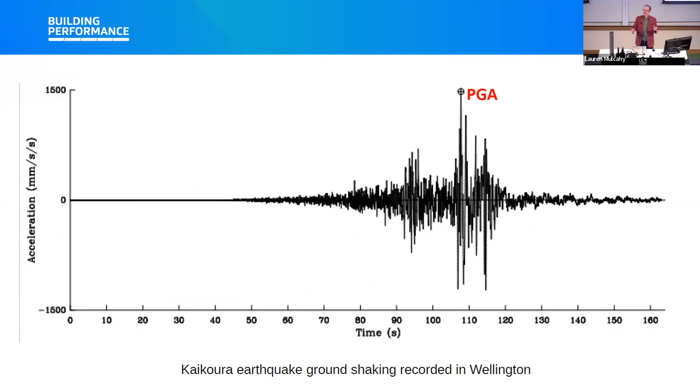Here I have to resort to a little bit of teaching in my new role. I don't get to teach as much as I used to, so please bear with me. But I think it's a good idea that we all start with the same basis, so let me explain exactly what the response spectrum is.

The response spectrum essentially captures a summary of those peak values of response of the structure, as opposed to the PGA, the peak of the ground motion. I've got a ground motion up there on top. I run that ground motion through a whole bunch of lollipops, single degree of freedoms with different periods, 0.5 seconds, 1 second, 2 seconds shown there, and I get some peak displacements. I summarize those peak displacements in a displacement spectrum. That is the output of the National Seismic Hazard Model.

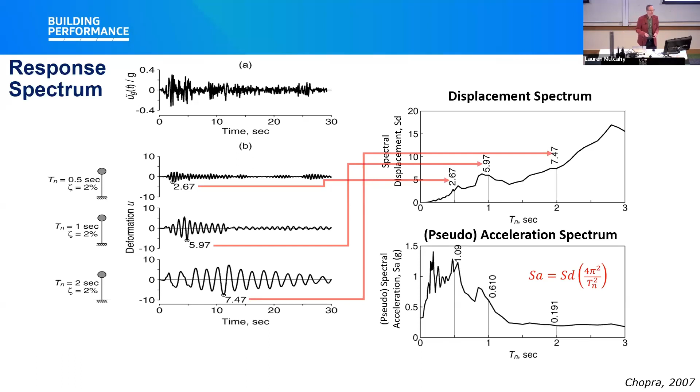That is then converted to an acceleration spectrum, but we technically call that a pseudo-acceleration spectrum, because we arrive at it by recognizing the relationship between displacement and acceleration of a single degree of freedom, which is to multiply the displacement by 4 pi squared over T squared. Don't worry about the details. I put pseudo in brackets because if you compare it to the actual total acceleration measured, the peak value, it's almost exactly the same, all the way up to a really large damping value, around 15-20%, where they start to diverge. So for all intents and purposes, the pseudo acceleration spectrum equals the acceleration spectrum, so we tend to just drop the word pseudo.

Why do we want that value? Well, we want to know the base shear to be able to design our structures, and so we know mass times acceleration equals force.

So the base shear is just that, but we tend to work in terms of weight times spectral acceleration, where that spectral acceleration is simply expressed in g. That is the basic equation that is in 1170 that we all use for the design of structures.

All right, so teaching's done. A bit more on the National Seismic Hazard Model, what it is and what it isn't. The National Seismic Hazard Model is exactly that: it is the hazard, the ground shaking hazard. It is not risk. Risk is really capturing the impact on society, and that really is about capturing the performance of the buildings. That is our next step, figuring out how to interpret the hazard in terms of the risk on our buildings and infrastructure.

But the National Seismic Hazard Model does provide really important input for risk-based decisions. What we're talking about there is we need to assess what our risk tolerance is, and based on that risk tolerance, we determine what values out of the National Seismic Hazard we actually want to use for design. In other words, what return period does one use for design?

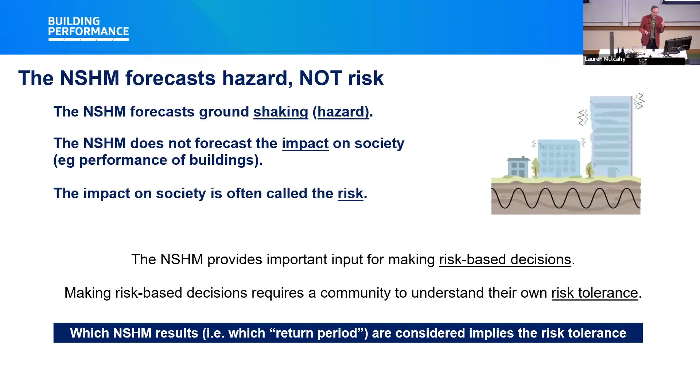We often think of 1 in 500 years, right? But that's not been written on stone tablets somewhere. It's convention. So let's take a moment and think about what the risk is and use that to guide our design decisions.

Some of the key changes within the National Seismic Hazard Model which are impacting the outcomes, the forecasts, are on both the earthquake rupture side and the ground motion side. And a big part of it is data. There's so much more data than there was 10 or 12 years ago when the 2010 National Seismic Hazard Model came out, and way more data and models available than when the 2002 model came out, which is really the basis for our 1170.5.

There's also been a lot more consideration of lower seismic regions and what sort of seismicity we might expect in those areas. Notice I said lower, not low. I think we've got to stop referring to any part of New Zealand as a low seismic region.

And another big consideration is the Hikurangi subduction zone. While there's still a lot for us to learn about it, we know a lot more now than we did back in the 2010 model. That's one of the big features that's really driving some of the changes.

And there's not just one ground motion model now, there's several ground motion models that are considered, and the outcomes of all those ground motion models are considered in arriving at the results of the National Seismic Hazard Model. But one of the biggest impacts of all is how site effects are captured.

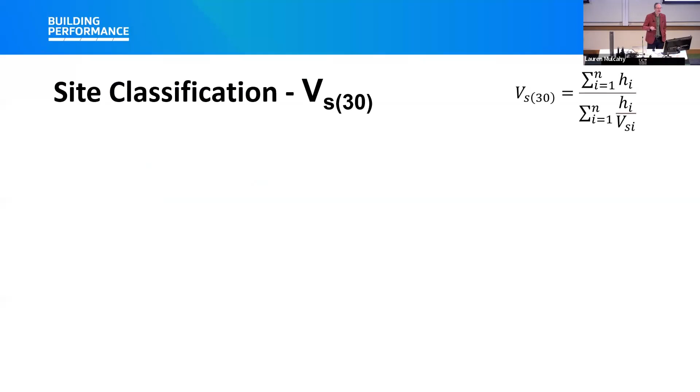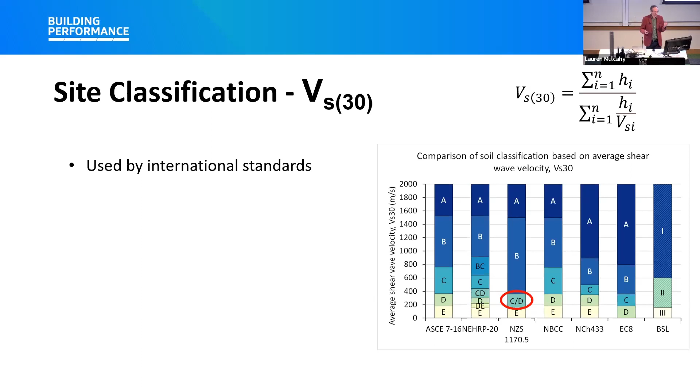Sjoerd is going to go into a lot more detail on VS30, but let me highlight a few things here. First, VS30 has been used in international standards and is actually used within 1170.5 currently to a certain extent. But in 1170.5, site classes C and D are not distinguished by VS30, and a lot of our sites in New Zealand cities are in that C and D range, so that's a pretty important range.

This is the main way in which sites are classified by international standards, and some examples are shown there. It is the only parameter used within the National Seismic Hazard Model to reflect site effects, that amplification of ground motion waves that I showed in the first slide. And all of the ground motion models embedded within the National Seismic Hazard Model use this term VS30, so it's really the only term that can directly relate to the outputs of the model.

So we're kind of stuck with it. It does provide us with a single measurable parameter that reflects some important characteristics of the site, the initial soil stiffness, and in some cases the site period as well. It may not be perfect, but it is a consistent basis for us to use. We'll talk more about it as we go through this afternoon. But it is going to lead to a distinction of sites compared to what we currently consider.

This is some great work by Chris McGann and his team here at the University of Canterbury, where they've identified the VS30 for sites in the Christchurch region and compared that to what site classes they would be classified as. You can see the wide range of VS30 values for both site class C and site class D, and even site class E.

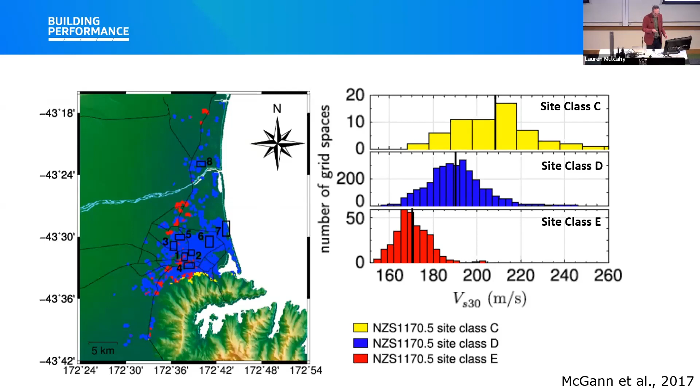Another thing I want to emphasize is that national maps are not reliable for site-specific design. These are two national maps out there in the literature, color-coded the same, so you can see the huge variation in results between these two studies. If you took a picture before I put up this warning, please take another picture: not suitable for site-specific design.

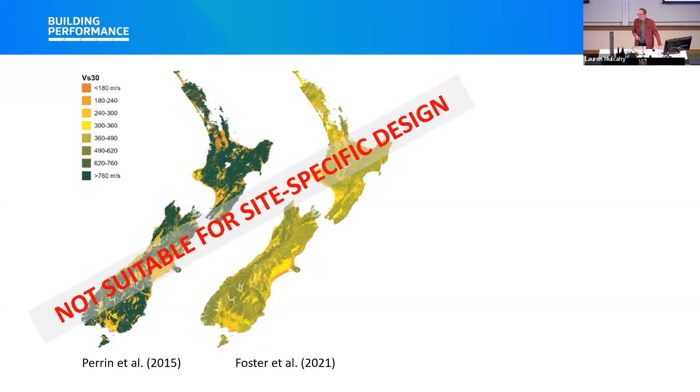So don't go looking for maps to pull up VS30. Really what needs to be done is a measurement of the VS30 at the site. There's good guidance provided for you in Module 2, and Sjoerd will be talking about this in more detail later on.

So enough about what the National Seismic Hazard Model is, let's look at some sample results. I do encourage you to go to this website that GNS has set up. It's a really great web tool to explore the results of the National Seismic Hazard Model. You can really geek out on it for a long time.

Let me just grab a few high-level observations. First, the key message from GNS in presenting the results is that the outcome for New Zealand can range from no change to more than doubling, depending on your location, site conditions, and so on.

The average increase over the previous National Seismic Hazard Model is about 50%, but it really depends on where you are. They emphasize that this increase in hazard doesn't necessarily translate directly into impact on buildings and performance of buildings, and that's really why we're here talking today.

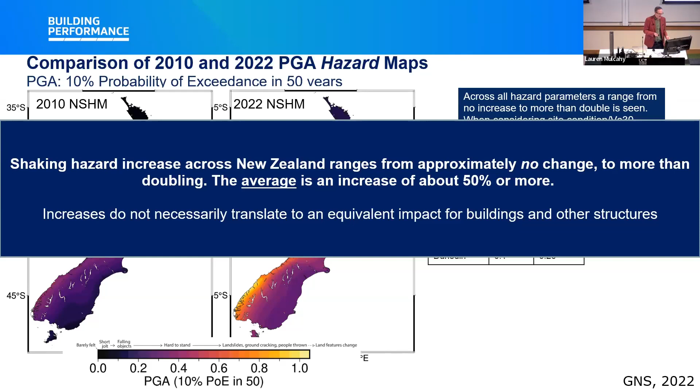What's shown in this slide is PGA, again comparing the 2010 National Seismic Hazard Model with the new National Seismic Hazard Model. You can see pretty big increases across much of the country. But we know that from a building performance perspective, PGA is not necessarily the be-all and end-all.

From our perspective as engineers, we want to compare to what the design standard has in it. So let me share some comparisons we've done to 1170.5. This is looking at Wellington, at 1 in 500 annual exceedance probability.

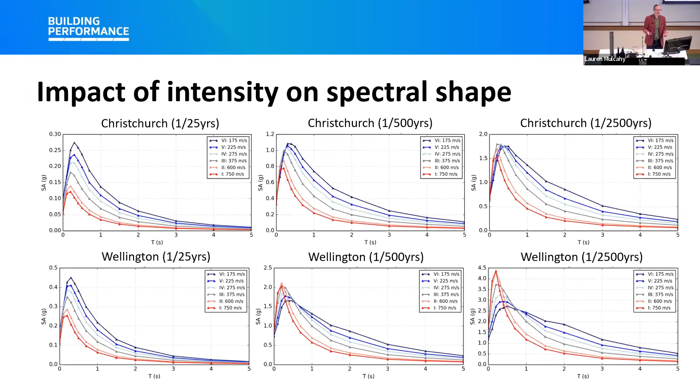Let's look at Wellington, where the intensities are even stronger. At 500 years you get considerably more of that crossover effect, and at 2,500 years you've got far more of it. Really, the soft soils can't transmit that intense motion, so they end up lower for the short periods, while it's the rock that's up at the high levels. This is something we've known for a long time, but we haven't really reflected it in the shape of our spectra used in 1170.5. I'll come back to that in a moment.

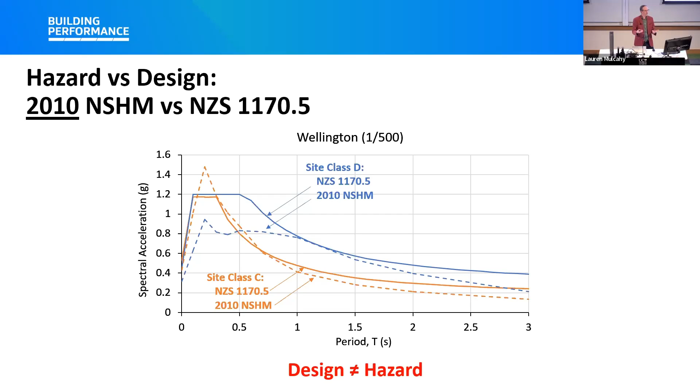So what happens next? Well, the first thing is nothing changes. The National Seismic Hazard Model is just that—it's a hazard model. It does not automatically change the way we design and assess buildings.

MBIE is carefully considering the results from the hazard model and how that's going to be applied to the building regulatory system, both in terms of new buildings and the assessment of existing buildings. For new buildings, we're working with Engineering New Zealand through the Seismic Risk Working Group, and I'll talk more about what they're doing in a moment, to assess what changes might be needed in our building standards and how this might affect the regulatory system.

For the seismic assessment of existing buildings, we're working with the technical societies to determine what possible changes might be necessary in terms of hazard used in seismic assessments. But in the meantime, it is wholly appropriate to continue using 1170.5 for all seismic assessments. There are no plans to change the earthquake-prone building system.

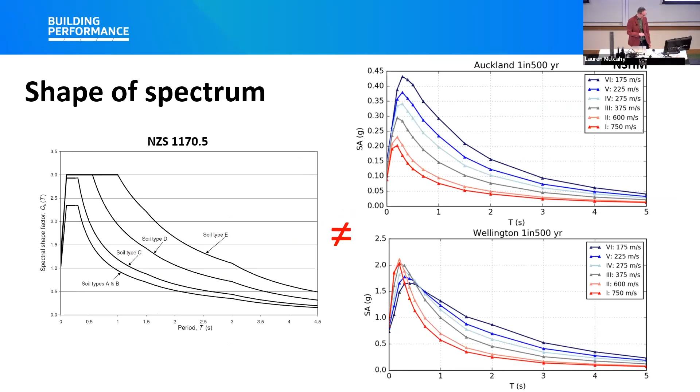That this difference really is not represented by our current 1170.5 spectrum. And so one idea is to actually represent that change in the shape of the spectrum by specifying 3 parameters, not just a Z value, but a PGA value, a top of the spectrum, and a corner period. With that, we're actually able to reasonably represent that changing shape of the spectrum as the intensity changes. So that's one thing that's under consideration. Again, draft still in development.

Then we need to think about what's the intensity that we want to design for. Okay, and here it's important to remember that while we may design for 1 point, we expect performance well beyond that point, good performance well beyond that point. And I like to reinforce this with Rob Jury's rainbow diagram, as I like to call it.

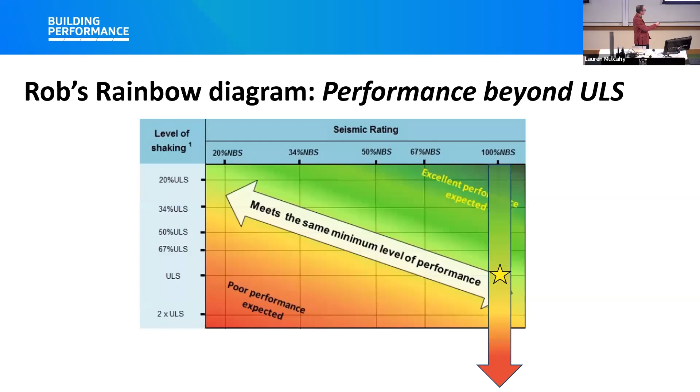And if we think about Rob Jury's curve here, we need to take into consideration that bad things can happen out on those tails of that curve. So how do we do that?

Well, we can represent that fading red color by thinking of a fragility curve. Okay, and that's the probability. Technically, this is the fragility curve for collapse, but I like to think of it as the fragility curve for bad things happening. Okay, so progressively, there's a higher probability of bad things happening as you go to larger and larger shaking.

And then we can integrate those two together, take the probability of having that shaking with the probability of bad things happening given that shaking, and that gives us an assessment of the risk, the probability of that bad thing happening.

So we're considering the possibility of taking our uniform hazard spectrum and multiplying it by what we're calling a notional risk factor, perhaps, that varies by period and considers the fact that the short period building had lower risk than the long period building, adjusting based on period. But in the end, it's still a simple base shear that you design for.

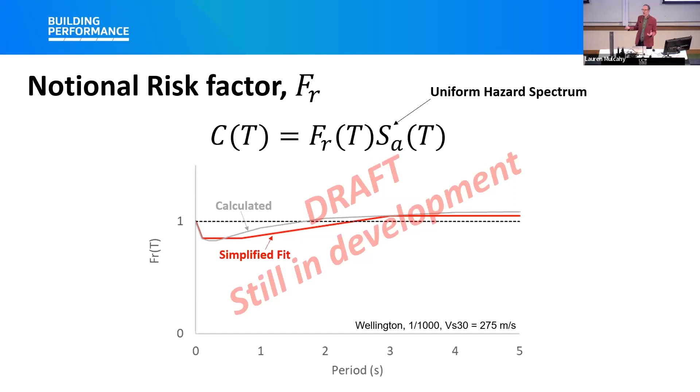Again, draft still in development. Site classification, we've already talked about this quite a bit, so I'll keep this short. Now we're looking to use VS30 because that's the parameter that links us to the National Seismic Hazard Model. But we recognize that VS30s can range considerably within the C to D region, so we're looking to maybe break that down into several subcategories.

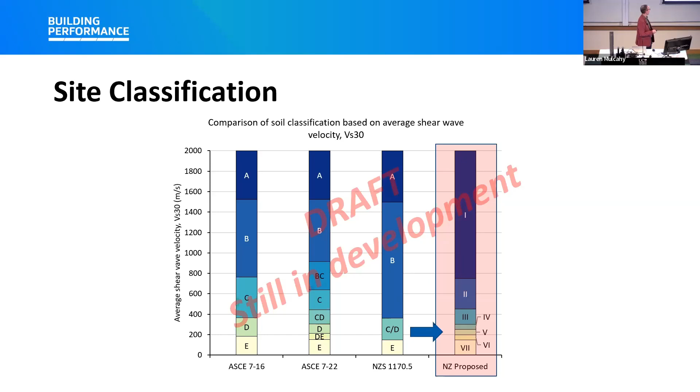Then importantly is how you actually measure and get that VS30 value, and there are several different ways in which you can do that. But what's important to recognize is no matter which method you use to arrive at your VS30, there is uncertainty in that number. So probably some bounding of that number, and looking at what hazard or design value results from that bounding, will be necessary.

Some consideration of parts and components, as well as possibly allowing for some rocking foundations for simple structures. These latter two are really considered in order to make design practical in light of the high seismic hazard we're seeing out of the National Seismic Hazard Model. So there'll be bounds on where these can be applied, but giving us practical design approaches for most buildings, or for some buildings.

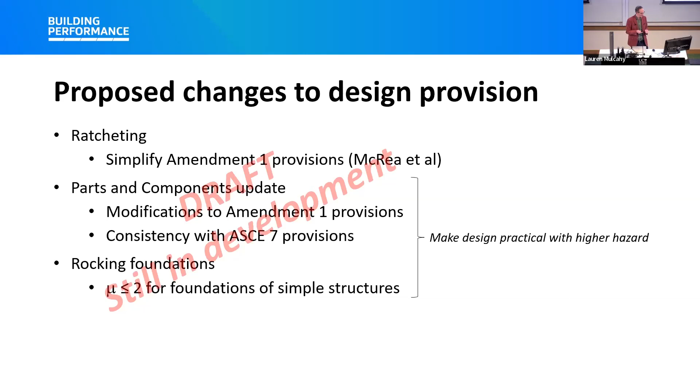And I should say that really there's much more to come on the design provision side of things in phase 2. Those changes are really going to be informed by what we're talking about here today, this Designing for Uncertainty advisory released by the technical societies. So a lot of these concepts we're talking about will feed into the deliberations during phase 2, and possibly into future provisions down the road. But I just want to leave you with a reminder that as of today, the National Seismic Hazard Model does not change the way we design and assess buildings. We're working on exactly what the National Seismic Hazard Model results mean for the future and for how we approach the building regulatory system. But again, I encourage you to engage with and use this Designing for Uncertainty guidance.

And with that, I will turn it over to Andy.

Cool. All right, thanks a lot, Ken. Thanks, Jeff. I should probably stand a bit closer to the mic, shouldn't I? And thanks for the introduction, Leah. Jeff, as you mentioned, provided some input into the advisories, hence standing up here today. Quite a big group of contributors, bit of an interest of mine, trying to find that seemingly impossible balance between performance and economy. Also representing NZSEE today, they're doing some quite interesting work in the space with their Resilient Buildings project, which I'll touch on briefly during the course of the talk as well.

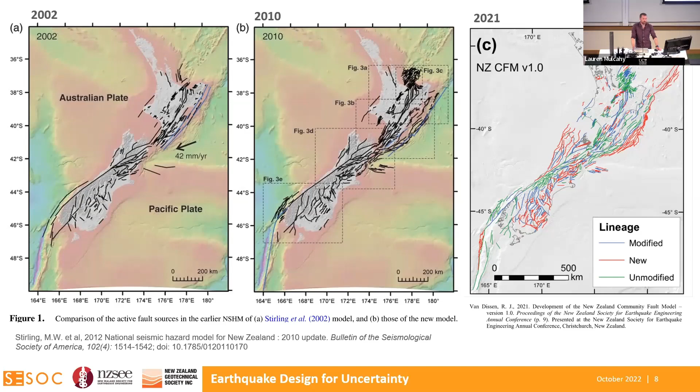0.2% annual probability of exceedance. What does that number mean to you? Where are we at on the clock?

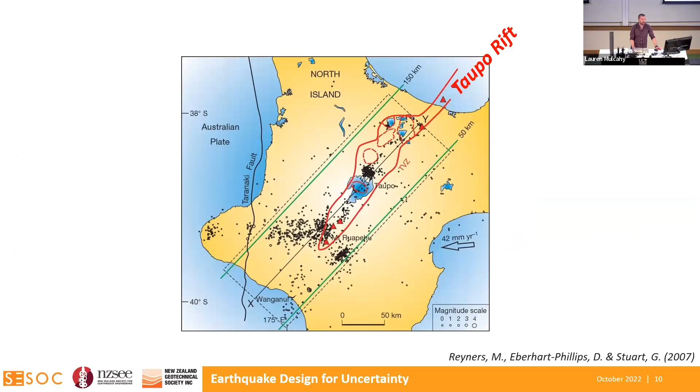Then if that earthquake occurs, there's huge uncertainty in how much shaking it'll actually generate at the ground surface and how long it'll last. It's a colossal amount below the ground surface that we'll never know completely.

All of this important work is going to continue. The way we describe earthquake hazard is going to change continually, improve, and fluctuate.

Then the built environment itself. Uncertainty in the ground, the structures sitting on or founded in, how the ground itself responds and what this means for shaking and distortions that the building feels, and how the two interact.

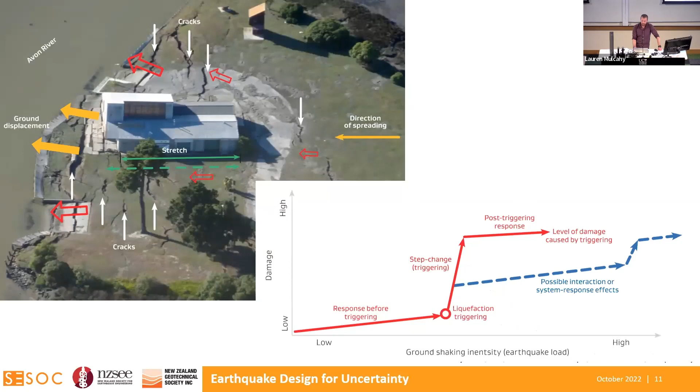Certainly not an elastic system. We've got uncertainty in the strengths of materials and even more in their deformation capacities. Uncertainties in how a structure overall responds dynamically to the shaking, and into all those other secondary contortions that we might not necessarily model.

This is a particularly simple and elegant illustration of uncertainties. David Hopkins helpfully forwarded a tidied up version with a few of the text scrawls overlain with some nice tidy text boxes, but I think I prefer the original.

It's real structures, he said, designed and built that have to resist earthquake actions, not the theoretical models that we analyze.

What David's shown on this diagram is a couple of calculation trajectories which sort of follow a path where vastly different assumptions made can lead to a vastly different outcome.

Although one way of interpreting this is to suggest that we should go down all of these paths and all of these rabbit holes and analyze and bound for all these various assumptions that we make, and to an extent that's true, to an extent we'll do some of that as part of our work.

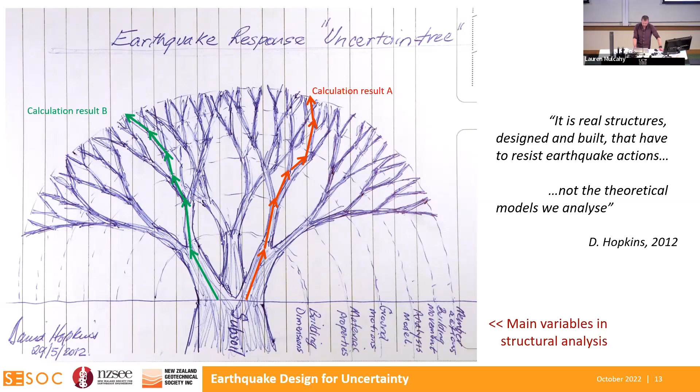But ultimately, what we come up with as a design should really just be desensitized to some of these uncertainties. And hopefully, as we go through, you'll see that I think that's possible.

Load resistance factor design. This is the current benchmark for delivering a safe design. We define an upper bound in our loads, a lower bound in our strengths, and we put factors on each side to get that unsafe area down to something that's good for us.

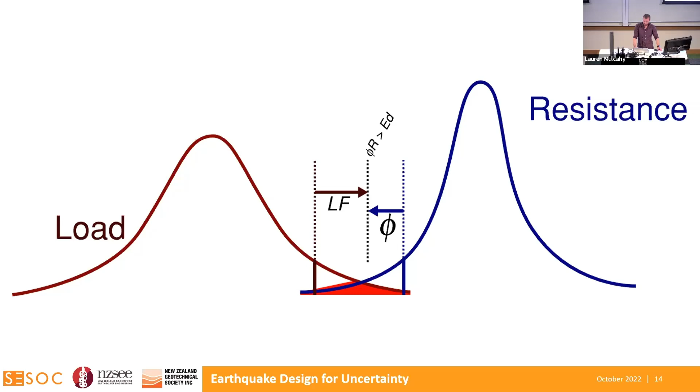So yes, failures occur, but there's a high level of control. We've got some influence over the loading, we know what's possible, and whether we choose to or not, we can have some control over it, and it's in our power to manage.

Compare this with seismic design. Load and resistance factor design does remain the benchmark, but the loading is completely beyond our control, let alone our ability to even quantify it. The considerable uncertainty needs a different mindset.

We select a return period for design. We pair that with an ultimate capacity, and we use resistance factors and safety factors, and we have some margins in our deformation limits. So these give us some sense of the reliability that we get at ultimate limit state, very high levels of reliability.

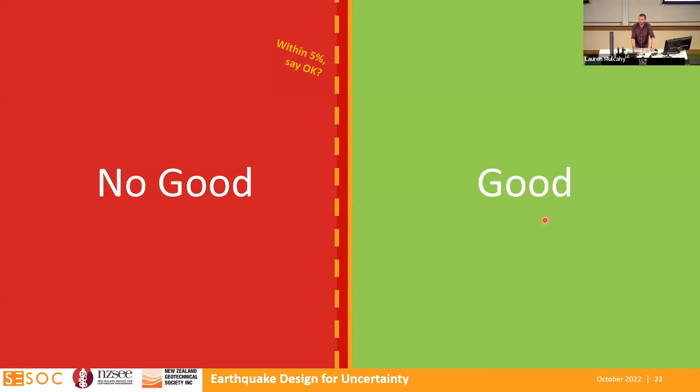Our design processes hide away a lot of this uncertainty because the process that we use to get code compliance, by comparison, is pretty damn certain. Whether you subscribe to that 5% rule or not, the simple and necessary compliance test tends to overemphasize design forces at the expense of that key ingredient for earthquake engineering design, which is designing for uncertainty.

So this, of course, we know, right? Uncertainty demands a certain engineering response. Ground shaking can't be controlled, but structural performance can be controlled. If graphs aren't your thing, then we can look at some evidence.

Past failures have taught us that significant failures rarely occur because the ground shaking was a bit more than expected. In fact, if a big earthquake happens, we actually expect it to be larger than the design level for a number of buildings in that region. So you're hard pressed to even call it a contributing cause.

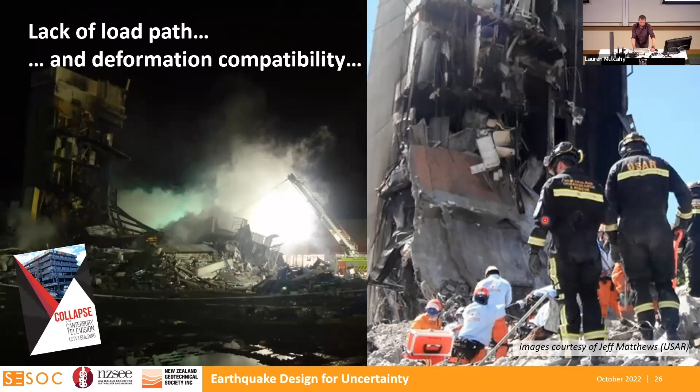Here in the Kaikoura earthquake, see what's left behind and what's left collapsed onto the floor below. Although a relatively flexible building, this is fundamentally a deformation compatibility issue. Although there is a basic load path problem with the loop bar detail, fundamentally a deformation compatibility problem here.

Significant configuration irregularities, both in the obvious change in structural form, but also significantly unbalanced lateral strength. Even the irregularities and transfers we think we can design through are problematic. Clever bespoke approaches have varied success. There aren't standard methods. The best engineering intentions and most rigorous analysis just too often miss the mark. These things just perform in ways we just don't expect, or we make mistakes.

And I hope this isn't too far of an overreach of David Hopkins' uncertainty, but the uncertainty is just so much bigger for an irregular structure, almost beyond what good design can deal with properly. And there's little that can be done about that. Well-conceived, regular structures with clear load paths just perform better.

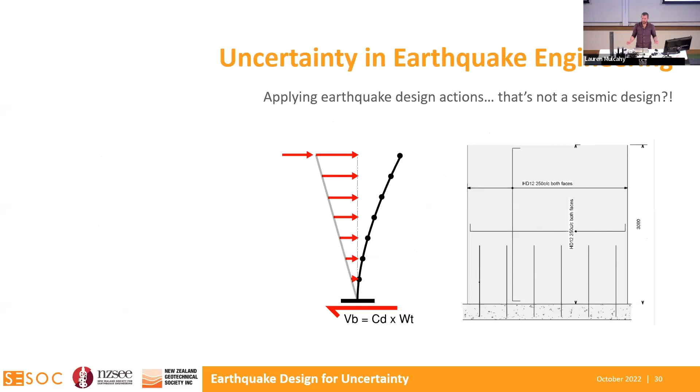Applying a set of design actions, sizing up and reinforcing some elements, that's not a seismic design. Well, not yet anyway. This is a seismic design.

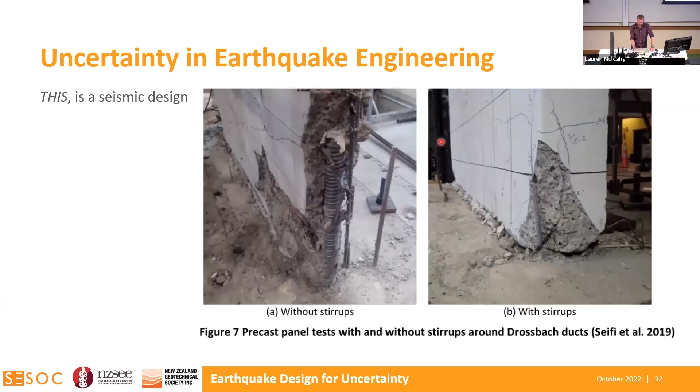And I'll put on the slide a few examples of some designs that Mick would happily pull out of his back pocket. We have a doubly reinforced wall, a precast wall with properly confined Drossbach ducts. And here's a test image from a research paper illustrating why we do that. The image on the left without confinement, and there are similar images from real walls following the Canterbury earthquakes.

So these concepts form the background to this document. The concepts are sound, they're not new. This new hazard model release is really just a great opportunity to highlight the relevance of them. As you've heard from Ken, until B1 VM1 is updated, there's no change to minimum regulatory requirements for building design. But if there's any question as to what developers can do in light of this new information, then this is the recommended answer.

This is one of the takeaways which reinforces that even before B1 VM1 is updated, even if engineers are continuing to use 1170.5 loadings with the geotechnical practice modules, these design principles can have a very large influence on actually achieving the real performance that we want. And it's so much more likely that in 5, 10, or even 50 years' time, we'll look back and be just as happy with that expected performance. And that's got commercial value.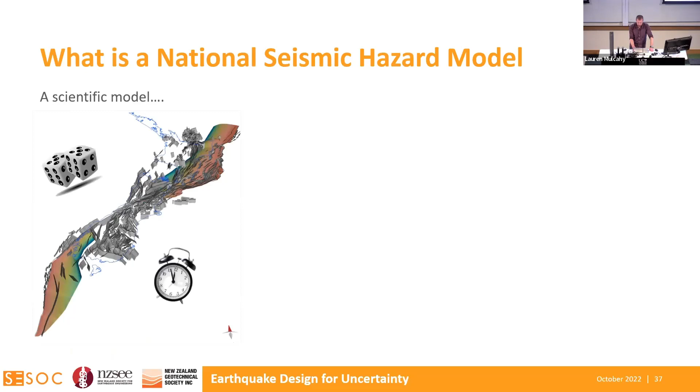And if you can see the faint blue outline underneath these zones on the zone diagram, we do the same with all the faults not yet discovered or not yet in existence. We make some allowance for those, and we do a similar thing.

For every one of those, we estimate how much shaking they'd cause if they went. And there's a big roll of the dice there too, because there's huge uncertainty bands in that. It's a very hard thing to estimate.

We multiply the two together, add it all up, and all of a sudden, with a lot of calculation, we have a hazard model. We can now see how likely it is that within our lifetime, or our notional lifetime, a certain level of shaking might be exceeded.

So there's a few different ways that we can use this information or interpret this information, and one is through maps like you see here, and another is through a hazard curve.

This is an example from a Wellington site. It's for peak ground acceleration, and as we increase that reference PGA, we see that it becomes less and less likely that an event in our lifetime, or ever for that matter, would exceed that reference PGA.

And if we pick a probability level of interest, say that 10% in 50 years, or that 500-year return period value that we're used to, and combine hazard curves together, then we get something much more familiar looking, a uniform hazard spectrum. This is usually far more interesting to us as engineers, or at least structural engineers.

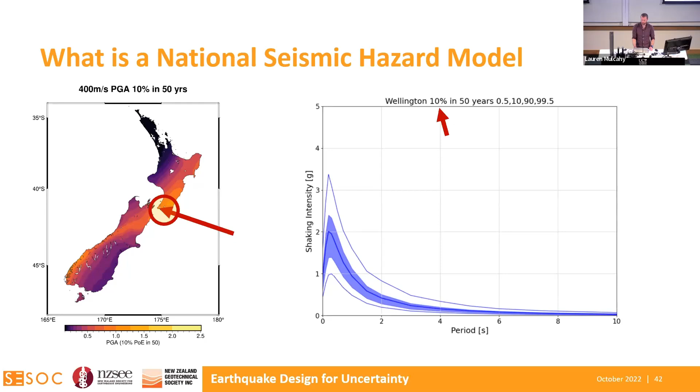We're very used to this idea of using a 500-year return period for our importance level 2 designs, but it's nothing real. It's a completely implicit value that is all part of the construct for trying to avoid collapse. But assuming that is decided, let's continue the comparison.

Left is a design spectrum from 1170.5. The scale's a little bit awkward because I did try and match them, so it's a little bit cramped.

But even if we did try and transplant a true UHS into our standard, there's other differences. Why does the design spectrum truncate the short periods? How is it decided where to draw that line?

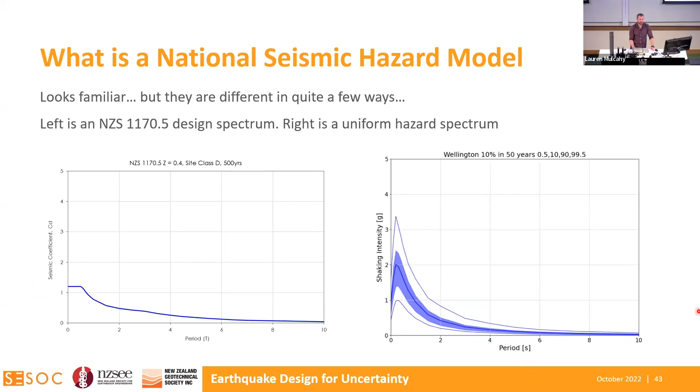Other adjustments are sometimes made to reflect geotechnical and structural behaviour and to factor in risk. Ken's already touched on that, and a bit more on that again soon.

But it would also be strange if a modern approach to seismic design involved basically hoping that an earthquake doesn't happen nearby. And yet in the lower seismic zones, that's exactly what can result from selecting a 500-year return period for design.

This is an Auckland example, albeit it's a few years old, and I'm not going to explain the slide fully. Suffice to say that historically in New Zealand, a lower limit Z value has been defined, 0.13 in Auckland, and it's based on a reasonable scenario of a severe earthquake reasonably close by.

It intends to force that level of robustness to avoid one of those peculiar and slightly uncomfortable pitfalls of probabilistic analysis. And looking at the 2022 model, thank goodness we did that.

And thus it follows that the hazard model itself is not a design standard. It doesn't mean that it can't be used, it can. And Shord will talk more about this soon, but it's important to recognize this.

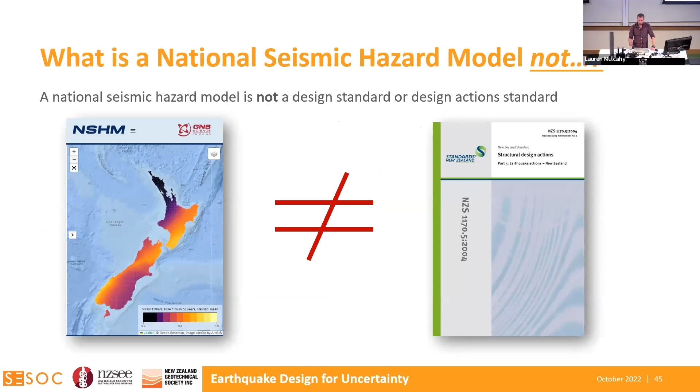Having this information so easily accessible is absolutely fantastic. It's pretty amazing to be able to interact with it so easily. Ken's already talked about the world-class research, and the portal itself is world-class. Even in its initial release with pre-populated data, there's a lot of information there and more features on the way. Very usable resource and excellently presented.

So Shord is going to spend a few moments now talking about a few subtleties with its use, particularly as much of it, as Ken's noted already, comes down to site classification.

All right, so I had a chance to have a play with the portal, and as Ken has alluded to, it's got site effects built in with the VS30 parameter as the main thing you put in, other than location and the probability of exceedance that you're looking for, and then you can get the spectra coming out.

I had to play in different areas because VS30, if that's a key input, drives the intensity for different areas. If it's unknown, we don't have it, we as engineers tend to have an approach of, I'll just pick a conservative number. If unknown, I'll just be a bit conservative.

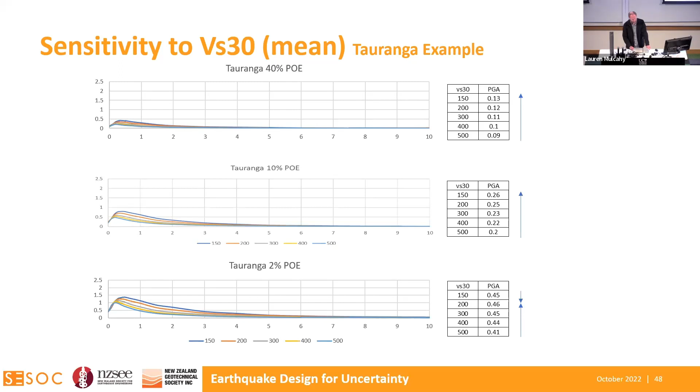If I start looking at Tauranga a bit more and then look at different probabilities of exceedance, the 2% being sort of closer to the 1 in 2,500 and the 40% probability of exceedance about the 1 in 100 gives you a sense of equivalence. What we can basically see is that the lower VS30 numbers are driving higher intensities, but not so much at the larger or lower probabilities of exceedance. And Wellington goes the other way.

So the intensities that we can get are dependent on VS30. It is sensitive, and so we need to put a good VS30 number in. We can't just take a guess at it. So what does a good VS30 classification look like?

Well, it's got to start with some robust seismic testing. But it could do the most perfect measurements in the world and still land in exactly the wrong place, because we need to consider the geology, the vertical stratigraphy, the horizontal stratigraphy and changes, spatial variability, and we need to think about how the ground behaves. Getting a location-specific VS30 may not actually give us a representative VS30 of site behavior for ground motions, and I'll go into that soon.

I'll make some comments about ground improvement and also non-linear soil behavior, and just some of the things we need to think about regarding the limitations of VS30.

So VS30 profiles can be inferred from boreholes and CPTs, and if we then infer them, we could go on to average the shear wave velocity over the top 30 meters and move on to estimate a VS30 number.

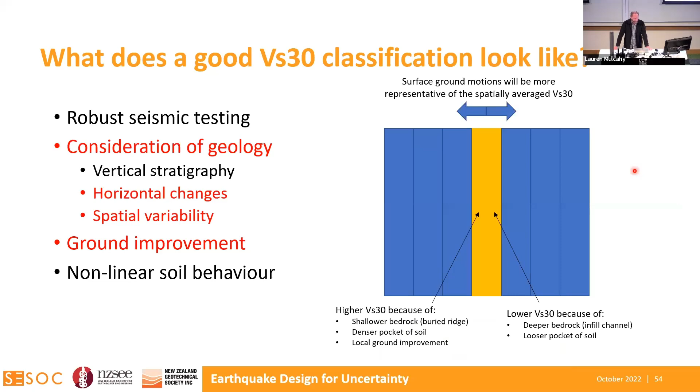So effectively here I've simplified that into a picture of different soil columns. The blue ones might be a higher VS30, the orange one might be a lower VS30 because all of a sudden it's an infill, incised channel, either side of that where the bedrock is shallower, or it could be a looser pocket of material. This system is going to behave together as a whole, and everything will be influencing each other, so the ground surface motions will start to spatially average.

So a location specific VS30 may not actually be the right thing to put in. You need a site VS30.

Likewise, this could be a denser material. I've seen some reports where ground improvements have been undertaken, and as a result it's been argued that because it's stiffer now, they can get a higher VS30 and hence change the site classification. Well, if this ground improvement is relatively narrow in extent, say 30 or 40 meters across, and we've got soft soils on either side, everything's going to flock together, move together, push and pull. That stiffer material is not going to behave as a stiff soil site. It's going to be some type of composite, because the soils either side will be pushing and pulling it. Again, there'll be some type of averaging.

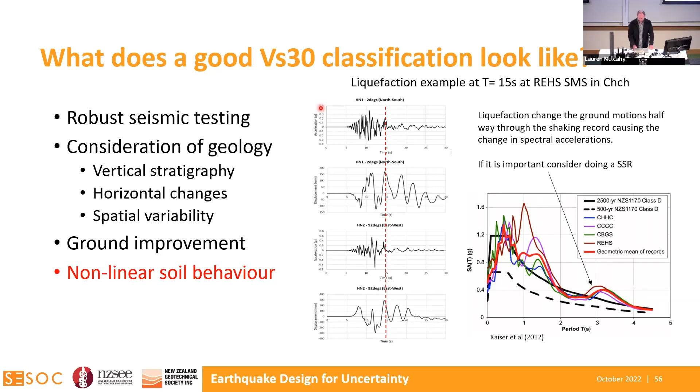Picking back up on Ken's slide, there's plenty of methods, but it all needs a very good dose of judgment. And there is uncertainty, and that needs to be bounded. It is an important parameter because, as I showed earlier, it does affect the shaking intensities that one would use for design. But because of the uncertainties, it's not just a single number. We need to bound that, and that will require quite a bit of expert input.

As I said before, data is very openly available and accessible, which is great for being able to interact with it. But to actually use it, we need a bit of expertise, and it's important to stay within our competence, both in terms of the geotechnical engineering aspects Sean just covered, but also for some projects, particularly special projects using more advanced types of analysis, where engineering seismology input can be really important to understand some of the subtleties around how the data comes out raw and what that might mean for how you use it.

So if we're saying the 2022 model is not a design standard but is being used to inform building regulations, the question that comes next is, might we not want to use this best information available to inform my design? The answer is absolutely yes, we can and should use the best knowledge available. But to answer this question properly, we need to look back at the processes used to develop building regs, including some international precedent.

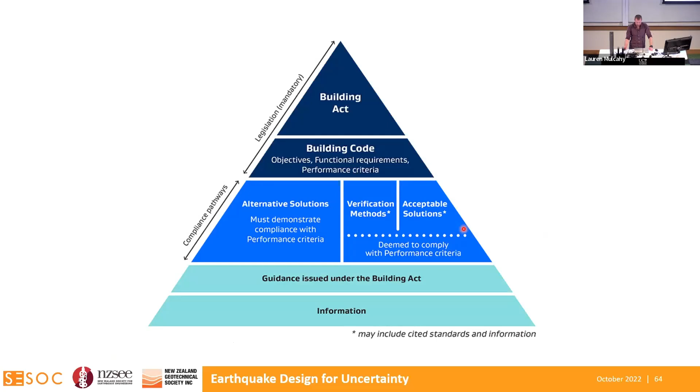This is the regulatory framework, and if we go right up to the top to our building regulations and building code, this is what we find: our building code objectives. It's interesting, they talk about risk, effectively injury or loss of amenity from structural collapse or structural behavior, and they say absolutely nothing about design return periods. Risk is a combination of likelihood and consequence, yet they don't actually tell us how much risk to accept either. Standards committees need to make some decisions, and to do that they need some inputs.

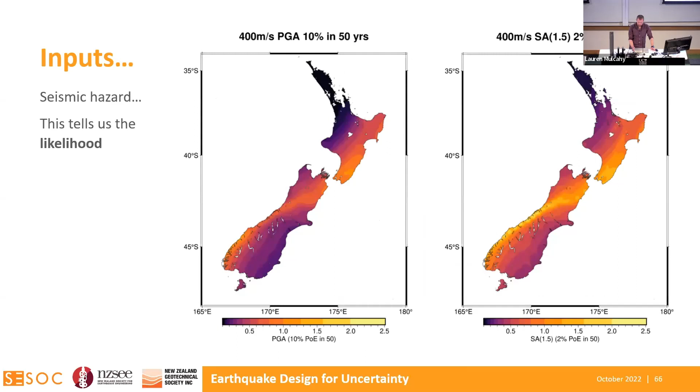But the reality is that sometimes new science teaches us things about what we don't know too, confronting things. And so maybe those lines can shift as well.

In practical terms, science can helpfully give us a range of plausible shaking intensities and an indication of likelihood, but ultimately we'll never know the earthquake that a given design will ultimately need to face. We'll continue to find ways to select and constrain models to better fit the real underlying phenomena that we're always learning more about.

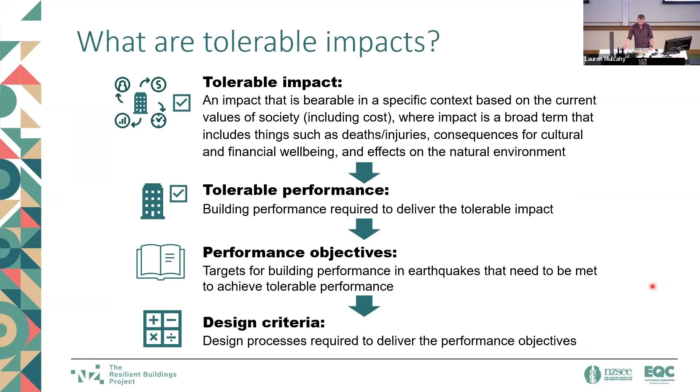Working out what impacts a community can tolerate, and that's not easy, but that allows us to turn that into building performance terms and ultimately into design standards. These are a few snippets from the Stage 2 report, which makes for some interesting reflections. The project thus far has found that life safety does remain people's first concern. It's held above all else.

People just expect safe buildings, but social and economic recovery soon become pretty important, and risk tolerance in that regard is actually quite variable across different types of communities, whether they be well connected or geographically isolated, whether they're high or low density living, and so on.

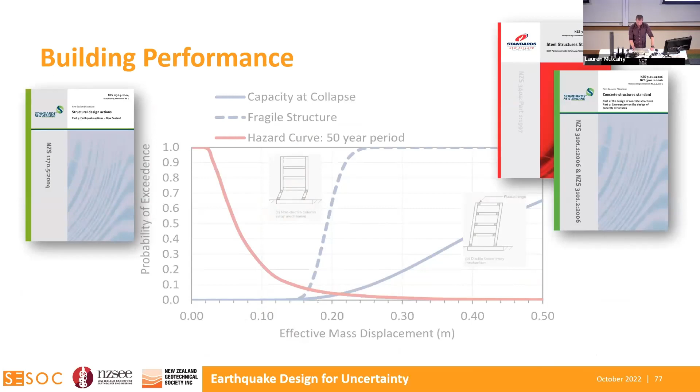Even if we choose to continue using that 500-year return period event for our ULS design point for IL2, we can factor in the way buildings truly perform. And if we chose to, we could choose to reward well-designed buildings better than we currently do.

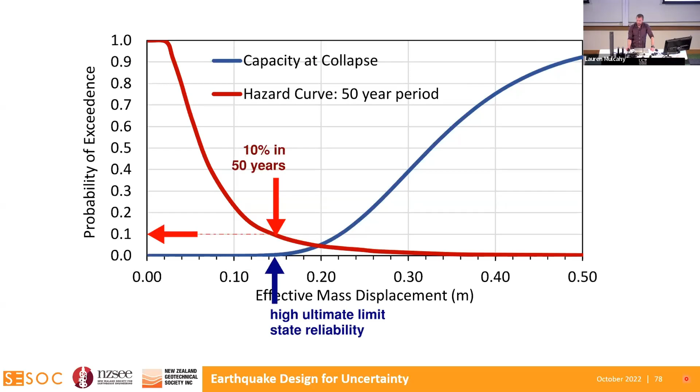In the US, a change was made to risk-adjusted hazard back in their 2010 design action standard. They call it risk-targeted design actions, and a paper was presented at the 2021 conference exploring how it could apply to New Zealand buildings, and you've heard more about the more recent proposals today. It's a bit complicated for sure, but it does make sense, and it's all done for us, so our design process can be kept simple.

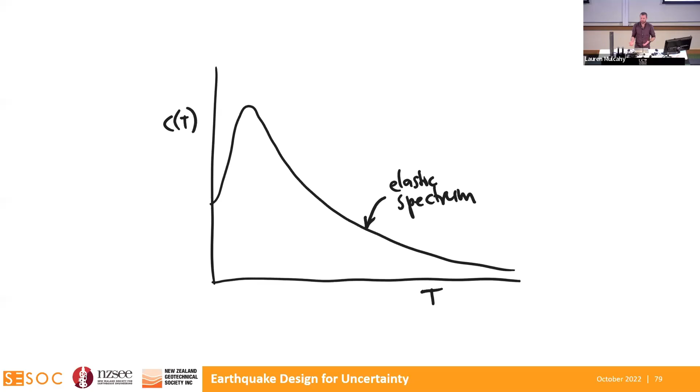That hasn't been done explicitly in New Zealand before, but there are other more implicit forms of risk adjustment that have, for example, that short period truncation. Short period buildings in particular can see proportionately larger benefits from various types of soil damping that come about from soil-structure interaction. Rather than carry out complicated analysis again and again on every project, a very simple adjustment by the experts can save us all the trouble and get us a similar outcome. And this is one of the reasons, not the only one, that we see this sort of adjustment quite clearly applied to our design spectra.

So scientists define the hazard, engineers help fold in building and geotechnical behaviour to describe the risks, and society decides what level of risk to accept. Together we feed that back up into our performance criteria and then filter it down through our design standards.

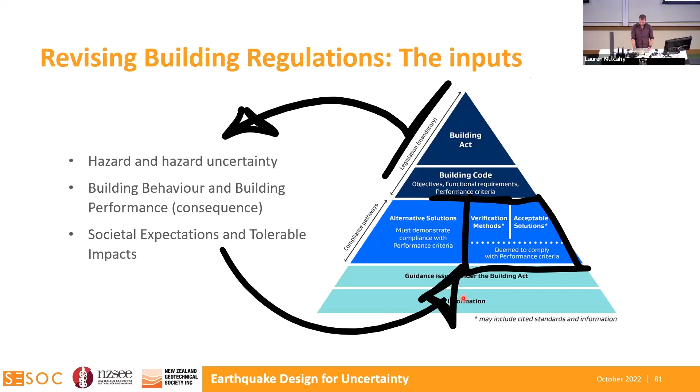So the summary out of all that is simply to reiterate that the future building code provisions aren't necessarily exactly what we're seeing in this '22 hazard model. The changes are enough of a jolt that we do need to step back and ask that big question, and we do need to review those risk settings. But on a simpler and more practical level, we really just need to recognise that to actually manage risk, we should be focused on design configuration foremost.

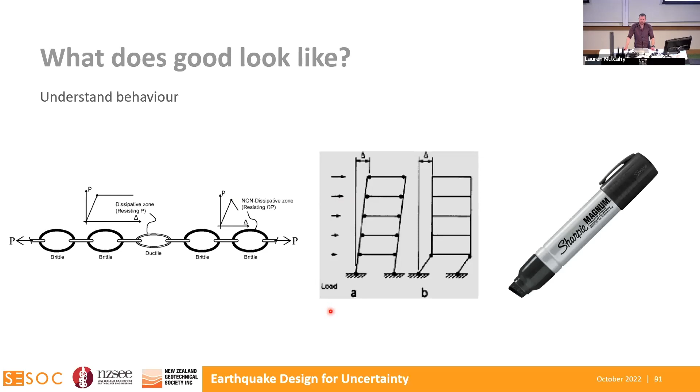So for low rise or simpler structures, it's robustness, load path, deformation compatibility, tying and avoiding brittle behaviors. For more significant structures, it's the same, but with deliberately controlled ductile global behaviors through capacity design. It's the stuff that you should be able to draw with a Magnum Sharpie.

At this point, Sean and I are going to lead into an example. It's a fairly simple example, but nonetheless, it at least gives you some insight into the way that these recommendations can be applied in practice.

So as we lead into the example, for geotechnical considerations, often there is a step change in ground behaviour. We don't get a progressively degrading ground. In the case of liquefaction, for example, nothing happens up to a certain point. There's a certain shaking intensity where something starts to occur, and then very quickly with a little bit more shaking intensity, it's all on and sort of plateaus out again.

So we need to consider the step change in ground behaviour, and in some locations for some projects, and in some shaking intensity zones, that step change could be occurring between SLS and ULS. And so the question that we do need to ask ourselves is: are ULS levels of damage acceptable to a client at return periods very much less than ULS?

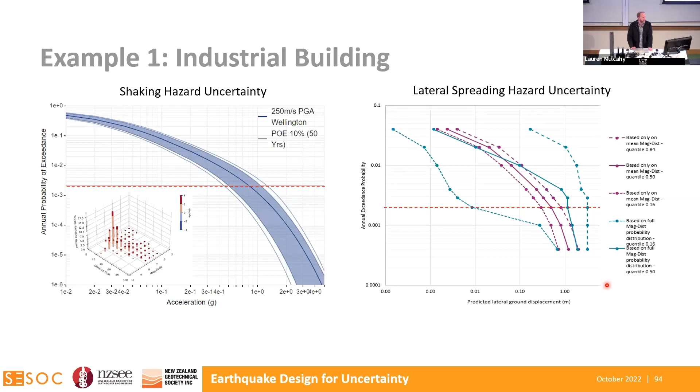We can get awfully precise in our numbers if we just pick a mean magnitude and think that's the number calculated, becoming quite certain when actually we don't have those levels of certainty.

So keeping all that uncertainty in mind, let's move now to an example. I've picked a small, quiet suburb in the Otago area, Glenorchy. I'm able to use this one because it's a report that's publicly available and published.

We've got all the elements here of a problem that occurs, a step change between SLS and ULS. So we've got a delta fan here that's built up over time, while the lake levels were higher, deposited underwater in a low energy environment. Subsequently, the lake levels have dropped in Lake Wakatipu, and you've got an overlay of delta deposits over the top. So effectively there's 25 to 30 meters of loose to medium dense sediment on this delta.

About 5 to 10 MPa of CPT tip resistance. There's a bit of a crust over the top, and there's a 25 meter high free face. So when that liquefies, you can set up quite a potential for some lateral spread.

And on top of that, sitting against the eastern side of the township is basically a steep slope that goes up for several hundred meters, with boulders and rocks and other things in there. So quite a lot of geologic hazard potential waiting there, in seismic shaking.

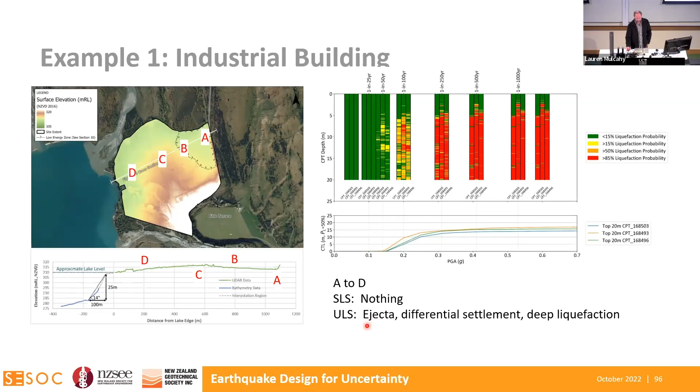And so at ULS, we could expect ejecta, differential settlement, deep liquefaction. Now, when we consider the free face, taking the median lateral spreading calculations, for different levels of shaking intensity or return periods based on the module 1 values, we can see the lateral spreading starting to increase.

The horizontal axis is distance back from the free face, and the vertical axis is the magnitude of lateral spread. What we can see is as the return period of shaking intensities increase, not only is the lateral spreading increasing, but also the distance back, so more of the soil profile or more of the township engages.

So now if we think about Site D, it's got a lateral spread issue, and quite a severe lateral spread issue at ULS. Ideally, if you could avoid that site, and had a client who had a number of sites to choose from, it's probably a good site to avoid.

Site C is about 600 meters back from the free face, and it's outside of the lateral spread zone for ULS. So you might be able to come up with some type of foundation system to deal with the ejecta and differential settlements. Site B is well and truly outside that, and Site A is too.

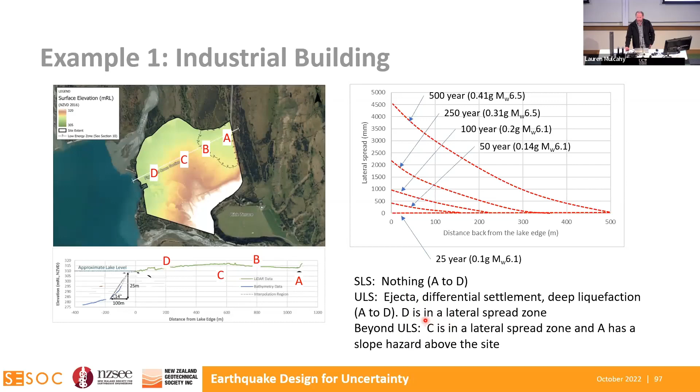So it's really important to start thinking, once we bring the uncertainty into consideration, of what that actually then practically means for the design considerations. So this is now where Andy will use that example: a highly documented design of an industrial warehouse facility going on one of these sites.

It's a fairly typical design. We have some precast perimeter walls, portal frames transversely, and cross bracing in the long direction. And just for this example, we have the cross bracing going down to ground.

So the designer of this portal frame decided to use a fixed base to get a nice, efficient column and rafter design. To do that, in this case, they've used a cast-in stub into a foundation beam element.

And so if we put this design in a couple of those locations, perhaps if we selected Site C, at least at the ultimate limit state, then we perhaps have a differential settlement issue, but we don't really have the problem that Site D would have with the issues of being so close to that free face.

And if we start to draw out some diagrams which help to convey the performance, we see that the consequence in Site C of differential settlement is ejecta, differentially dispersing to the ground surface, getting some settlement of that pad, and possibly also getting some rotation of that pad as it settles.

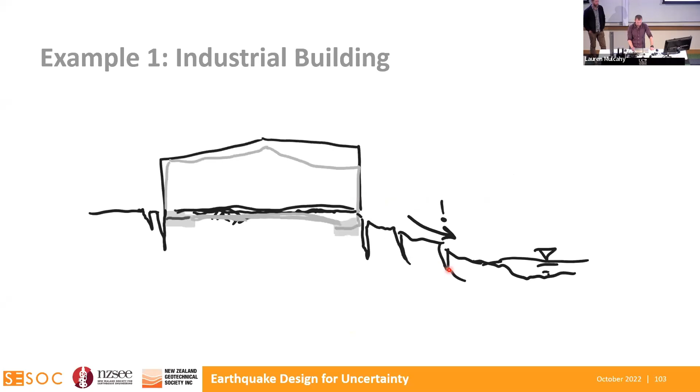If we shift that site to Dunedin - same site, could be Kingston, but Dunedin has much lower seismic hazard zone, shaking intensities all comparatively drop. So all the return periods shuffle up considerably, taking now the module 1 values for Dunedin. All of a sudden we see that even at 100-year, we don't have any lateral spreading. There's no liquefaction triggering. By the time we get to ULS, there's a little bit of lateral spreading, but site C would be well and truly outside.

Given it's only minor lenses of lateral spreading, of liquefaction triggering, at SLS, nothing's occurring. At ULS, we get some liquefaction, but there's a fairly substantial crust there. We'd only get very minor differential settlement in areas A to D, and it's only really beyond ULS that we start getting ejecta, differential settlement and deep liquefaction, and D coming into a lateral spread zone.

So theoretically, if we're applying code minimum, we wouldn't need to do any of this stuff, and just something like that is fine. Well, those things that Andy talked about, because there's no problem at SLS, there's no problem at ULS.

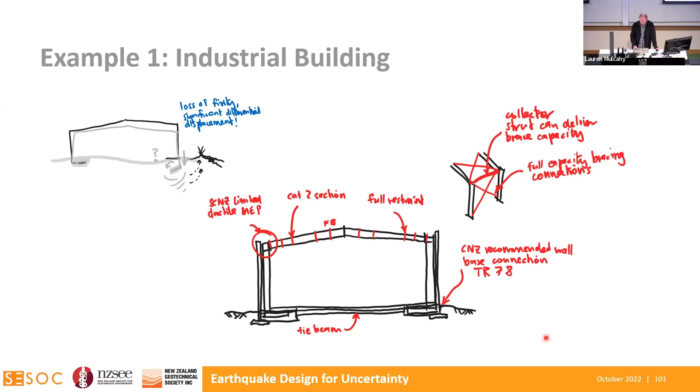Does it make good engineering sense to be on this side of the line and design it this way, just slightly over that side and have a different design? Shouldn't we be looking beyond and allowing for that uncertainty? That's a really good example of, in a lower seismic hazard zone beyond ULS, it would be good prudent practice, as per the guidelines, to prudently allow for that step change.

Now, for this example, we could also consider a different type of building, where the groundwater might be a bit shallow, and there could also be issues, and Andy will just talk to that as well.

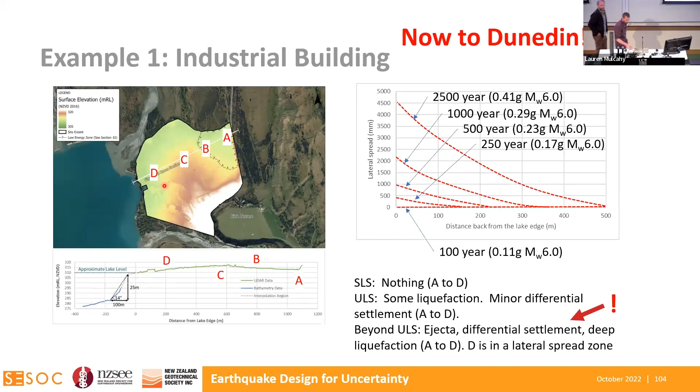As Sean said, it makes little sense to see a substantially different design outcome when we're on one or either side of that line. Perhaps we might shift mode slightly as designers and realize the intent here isn't to apply a ULS design process at a level of shaking beyond ULS, but we do need to think about testing that design more conceptually, considering its behavior for collapse risk. So maybe a slight change in approach to design thinking, but seeing that the outcome isn't really all that different.

This building on the Dunedin site - if we again saw those sorts of differential displacements, and if we'd applied the level of detailing shown earlier, then clearly we can see that there's no collapse risk and that we are fine to go on.

An interesting sidestep into what this looks like for something not constructed from the materials we're so used to, being concrete and steel. We talk about ductility, capacity design, and full capacity connections, but if we think about timber structures - again in this Dunedin example - we're really focused on the tolerance of the structure to some of these uncertain deformations. There are ways to detail connections in timber to ensure they behave in a ductile manner, and our new timber standard forthcoming - a little birdie told me it's very, very close to being published - will give us the tools to apply this thinking to timber connections.

Taking that way of thinking and bringing it into a much briefer, more succinct example - that idea of testing for collapse potential under liquefaction post-ULS.

On the left, we have a simple example, probably still in a relatively low seismic zone, of a wall on a gravity footing on a relatively stiff crust. If we find that beyond ULS we could have either differential settlement from ejecta, or a bearing capacity issue develop due to a thin crust, or both of those things, then we can quickly see how large displacements in the order of hundreds of millimeters could quite quickly lead to a very one-sided response and possibly reach that point of gross instability, depending on the slenderness of this element.

If on the right we think about changing that footing system, maybe we can keep it shallow, but move to something able to engage the whole building stability. We use continuous columns, and maybe even provide a continuous backup frame - probably a bit easier in concrete than in steel, where that might be more expensive. But largely it's just thinking about whether we can test this design to that same order of magnitude, hundreds of millimeters of displacement, a relatively qualitative test. And we see that it passes that test far more easily.

I have a few other brief multi-story examples to highlight, mostly references back to the SESOC interim design guidelines. Our steel standard, particularly following the 2007 amendment, has a really nice structure to the way it categorizes structures and provides robustness. But notwithstanding, there are quite a few clauses to flick between, and sometimes a bit of a loss in clarity as to whether we're actually ensuring that good behavior, particularly when our chosen design ductility is low. We can get trapped in the step-by-step detailed design procedures, and it's good to zoom out a bit. So this is an example, an outtake from the new SESOC guidelines, that helps designers be assured of good global behavior.

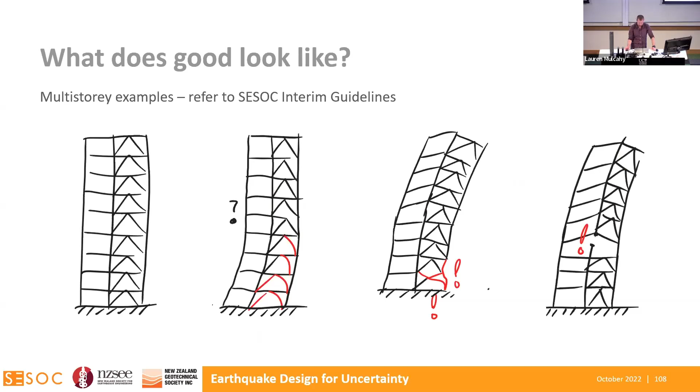But elastic CBFs are often also designed and detailed elastically, and the minimum requirements for those are quite lenient. There are some recommendations given on how we can be a bit more confident of getting this rather than these two on the right. So the guidelines include some detail on that as well.

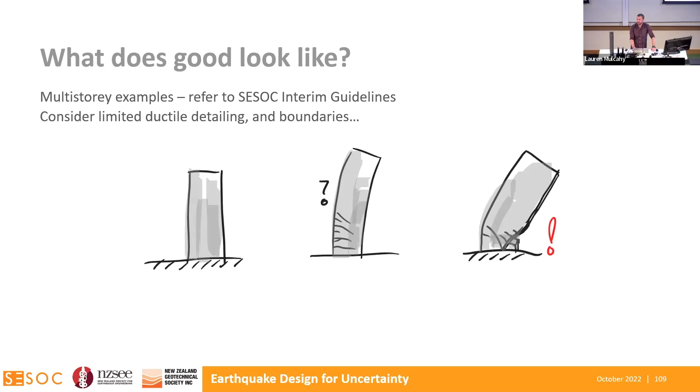And if we go beyond squatter wall buildings and move into the more slender, taller cantilevered wall types, there's a few comments to make there too. Our concrete standards have very good ductile detailing provisions, but nominally ductile walls now enjoy a complete lack of cross ties, far reduced consideration of out-of-plane stability, and might even be singly reinforced.

This here is one of a number of discrete cantilevered wall elements in a lower seismic zone, supporting up to 10 stories of building. It could be detailed as a nominally ductile wall. In 1982, there were provisions for a non-seismic column type which allowed light and non-ductile detailing, and all that was required to permit that was a slightly lower strength reduction factor of 0.7.

Experience has obviously shown us that approach was flawed. It's also required expensive programs of reviews and retrofits, not to mention some of the tragic consequences. Although well-intended, there's a certain irony that singly reinforced walls in our concrete standard have now been assigned a lower strength reduction factor of 0.7.

This wall here is not singly reinforced, but the idea of a completely unconfined tall wall is quite uncomfortable, and there are really good reasons that a developer would wisely agree that a few extra stirrups and prefabricated hoop cages should absolutely be provided. So limited ductile detailing has been provided in this wall hinge, with nominal confinement to boundaries above that zone. The designer chose a slightly thicker wall thickness to help fit that confinement and add stability, and we're able to reduce the wall length a little bit as a result.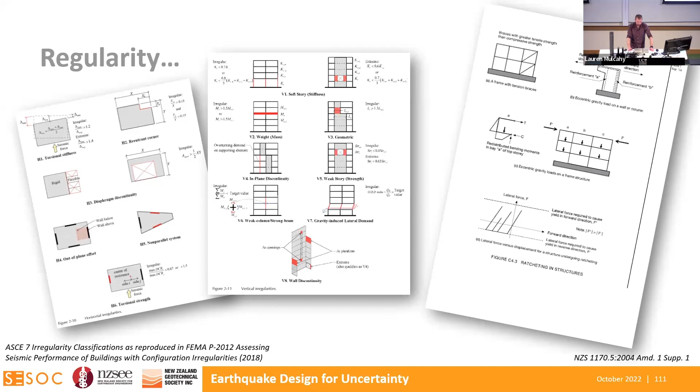There's a few references pasted here. We obviously have the provisions in our own design action standard. There's a broader set of classifications in ASCE 7. And there's a couple of documents I've put in the middle which provide some helpful commentary, particularly this interesting one, Designing for Earthquakes, a Manual for Architects, helping us put some of these considerations into language which is a bit more relatable and help our friends and peers on design teams recognize that this is actually quite a reasonable strategy that often has benefits in common with other parts of the brief, such as driving efficient, cost-effective designs.

The final few slides, again, before I hand over, a very brief prompt for clear and consistent communication with our clients.

Working with consistent language and a common means of communication as we talk to each other and to our customers will help us work through this period of the next few years with much more ease and really start to elevate the importance of some of these key principles.

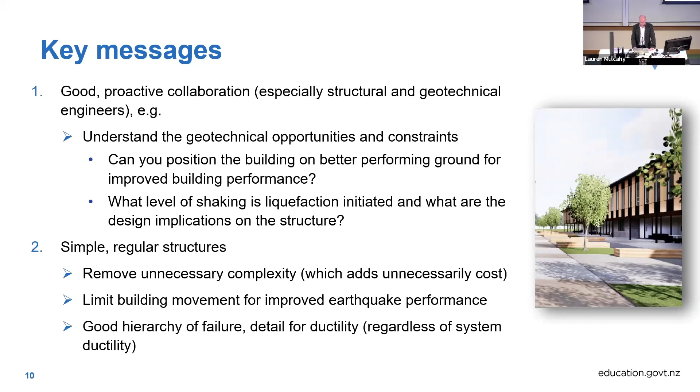We did a recent example in Wellington where designers were asked to look at minimum building code requirements versus, in this case, a site-specific hazard analysis on top of our SGR requirements. For a $9 million build, the higher requirements plus the site-specific hazard analysis in Wellington came up with a $200K difference in build cost, which I'm sure many of you would consider is not a significant difference when you're looking at a much more resilient structure.

A lot of the messages presented in the SGR are very much aligned to the messages given to you in the Earthquake Design for Uncertainty document. In addition to the previous good design practices, we also specify specific performance requirements for school buildings, and we introduce an SLS2, or an intermediate level of performance, to really delay the onset of damage in our structures to much larger levels of shaking.

At that intermediate level, we require that schools remain usable, and that doesn't mean there's no damage. It just means that where there is damage, that doesn't impact the safety, access, or egress to that building. Where there is damage, it's limited and can be repaired within a reasonably short time frame, which for schools we've defined as a 2 to 8 week period, reflecting the school holiday shutdown period. Because schools are required to remain usable, it extends not just to the primary structure, but also to non-structural elements: your cladding, ceilings, partition walls, and some building services.

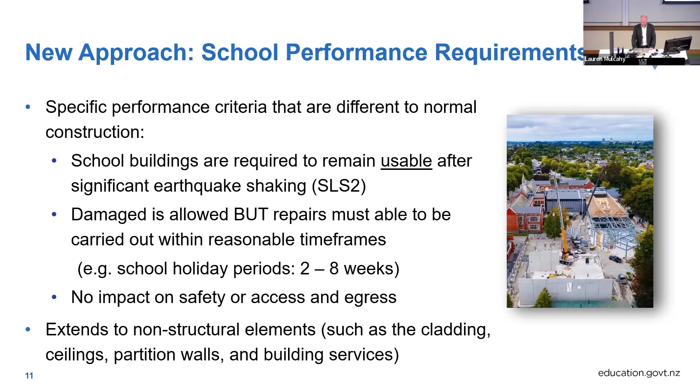The intermediate level of performance is defined at SLS2 return periods. These have been set similar to what you would have for civil defence buildings or other importance level 4 buildings, except scaled down for school purposes.

Linking back to what Shaw was mentioning in his presentation, it's important that even though we've defined our SLS2 at 100-year or 250-year return periods, we really want the geotechnical engineers to tell us if you're getting liquefaction initiated at much lower levels of shaking, and feed that information to the structural engineers so that we can get better performing buildings at the more regularly occurring levels of earthquake shaking.

So what are the performance criteria? There's the usual SLS1 and ULS. SLS1 is very similar to the building code, where at low levels of earthquake shaking, the school should be able to be used as normal with no loss in amenity. This means there's no loss in the ability of the structure to resist future earthquakes. The non-structural and secondary elements remain intact. Building services remain operational. Readily repairable damage is permitted, provided it can be repaired immediately or as part of a usual building maintenance schedule.

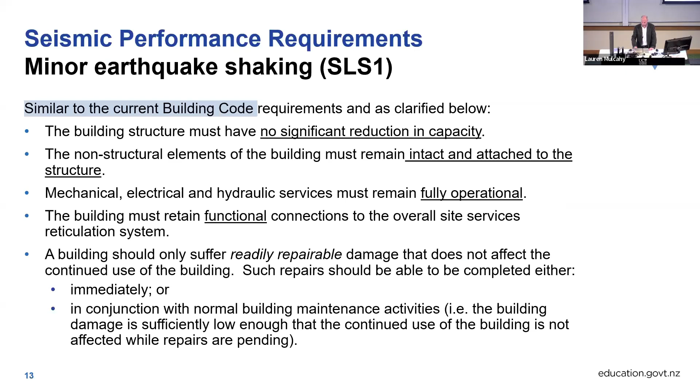The SLS2 performance criteria does go beyond building code requirements, and this captures more significant levels of earthquake shaking. Fundamentally, this represents what we experienced in Christchurch after the Canterbury events, where we had the September event, followed by the February event. So we've got a requirement that a school building should be able to withstand an SLS2 event, and then immediately after be able to sustain a ULS event with acceptable performance.

Some reduced amenity is accepted, provided that the building can continue to be used for its intended purpose and that the building can be returned back to a normal state within that 2 to 8 week time frame.

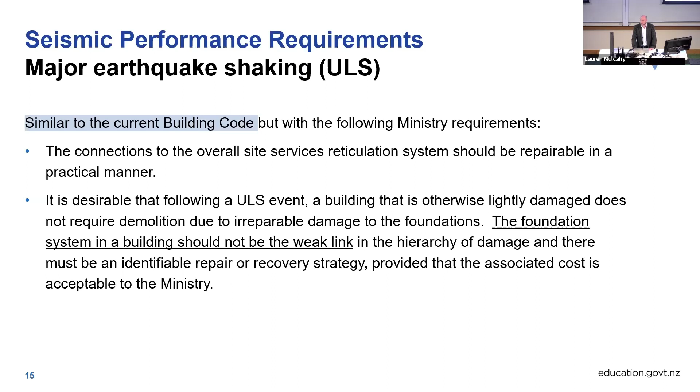At major levels of earthquake shaking, or a ULS event, it's fundamentally the same as building code, with two exceptions: we require our connections to site infrastructure to be designed so that they're repairable, and that the foundations are designed to ensure they're not the weakest link in the hierarchy of damage. There's no point designing a really robust, resilient superstructure when your foundation is going to perform really poorly and ultimately require that building to be demolished. We saw too much of that following the Canterbury earthquakes, and so there's a requirement that the foundation is not the weakest link in that hierarchy of damage.

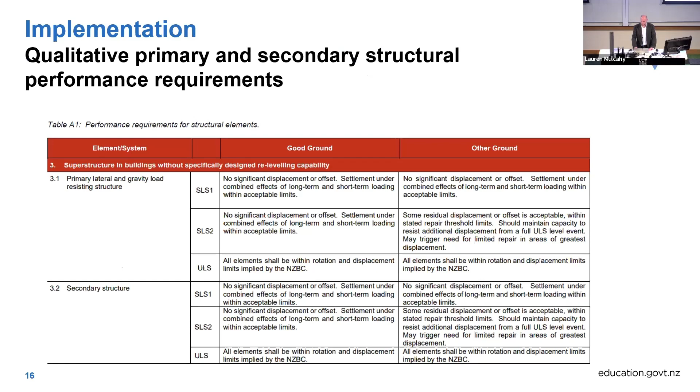In addition to these broad descriptions of performance requirements, we also provide detailed guidance for how designers can achieve them. For the primary lateral resisting system, we provided qualitative statements around the SLS1, SLS2, and ULS performance, the key one being at SLS2, where the structure should maintain capacity to resist additional displacement from a full ULS event.

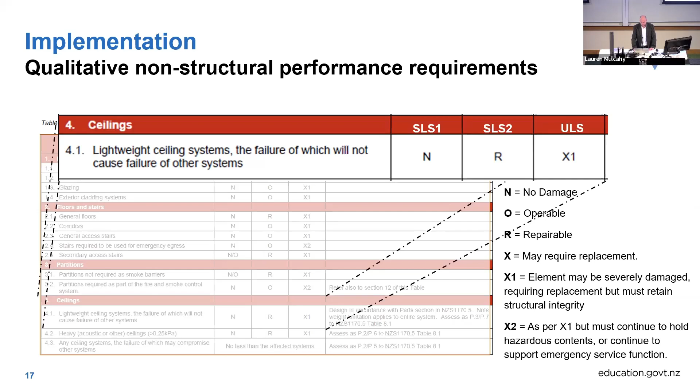The guidance also extends to non-structural elements, again with a description of the level of damage expected at different levels of earthquake shaking. For ceilings, they should not be damaged at SLS1. They should be repairable at SLS2, and at ULS they can be badly damaged, but must remain intact to the structure so they don't represent a falling hazard to people within the building.

Fundamentally, we turn the whole design process around. Rather than focusing on ULS loads and then checking for SLS1 drifts, we design the structure based on our SLS2 actions and limit those drifts at the SLS2 level of shaking, then check compliance for ULS and SLS1 drifts.

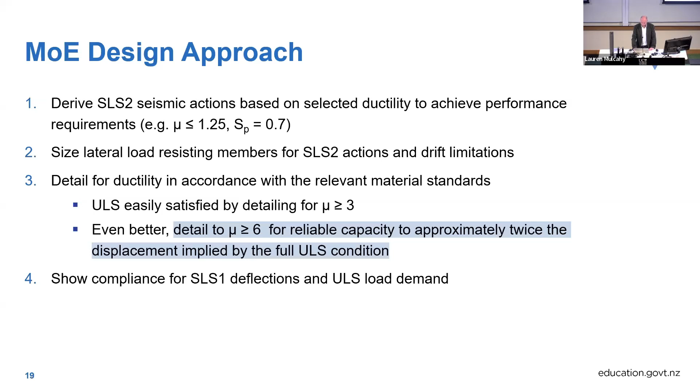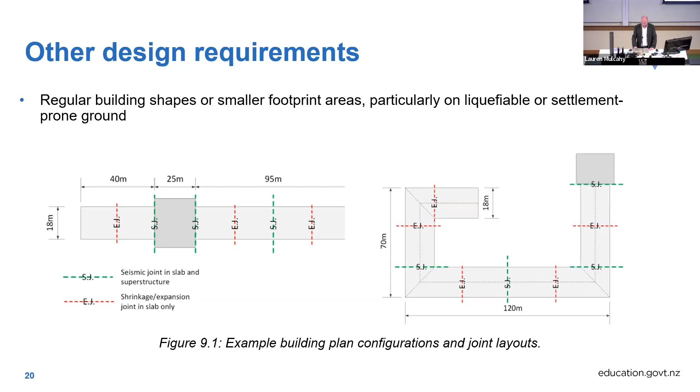As well as detailing the lateral system for ductility, we also have a requirement around all significant load-bearing elements, so those are your gravity columns or even your gravity wall elements, to be detailed using the geometric requirements and the relevant material standards for ductility.

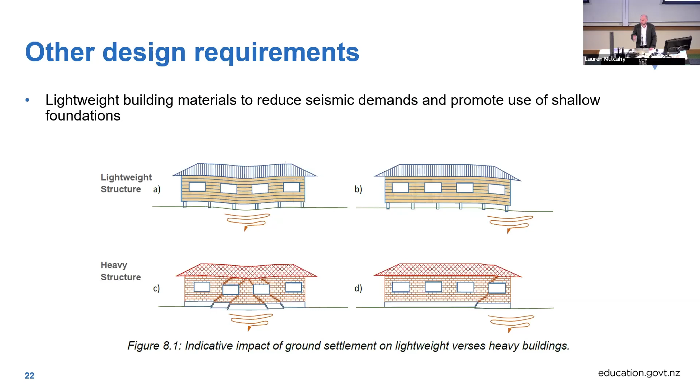We also have a priority in trying to promote the use of lightweight materials for the structure, as this reduces both your seismic demands on the structure and promotes the use of shallow foundations, potentially getting away with some of the deep pile solutions that we see.

As part of coming to a design for a school, we also asked the engineers and the design team as a whole to look at various options. This is really to help inform our asset management colleagues around whether it's worthwhile investing more money in having a more resilient structure or not.

Now back to the case study I alluded to earlier. We've got a really good one of a school that was built in 2010. This was prior to the introduction of this document, and the building itself met building code at the time: no damage is expected in a minor level earthquake, a 1 in 25 year event, and there's no collapse at the 1 in 1,000 year event.

Fast forward 10 years from when that building was designed, there's now stage 2 required at that school site, and stage 2 looks like connecting onto the original stage 1 buildings. Because of that interconnection between the new and the old, we asked the engineers to go away and have a look at how that original stage 1 structure performs under that SLS2 level shaking.

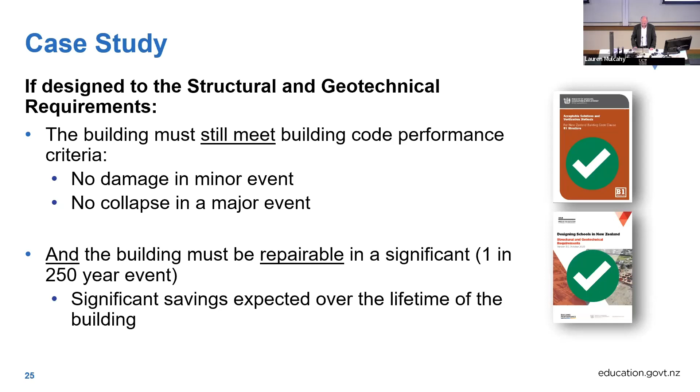For those that aren't familiar with it, if you want to read the document, just Google MOE SGR and you'll get taken to a link with the document, which is freely available to download. There's also a 2-page summary sheet there, which you can give to your architectural colleagues, describing the principles quite succinctly. We've got some other useful templates on our webpage as well.

Now, a lot of people ask how you get architects to buy into this whole resilient design, or adding additional robustness to your design. I think the answer is around what we're seeing out there with changes in calculating your whole of life embodied carbon, and the drive in the industry to lower both our embodied carbon and operational carbon aspects. Resilient structures, capable of resisting a wider range of earthquake shaking, fundamentally have lower embodied carbon calculations over their whole of life when you do the assessment.

So not only are you ticking the resilience box, but as we start to see more and more targets put in for embodied carbon, you're going to get architects wanting to drive this whole approach around lower embodied carbon. That's not just through substituting concrete and steel for timber - there are deeper fundamental issues around resilience which help achieve those objectives as well.